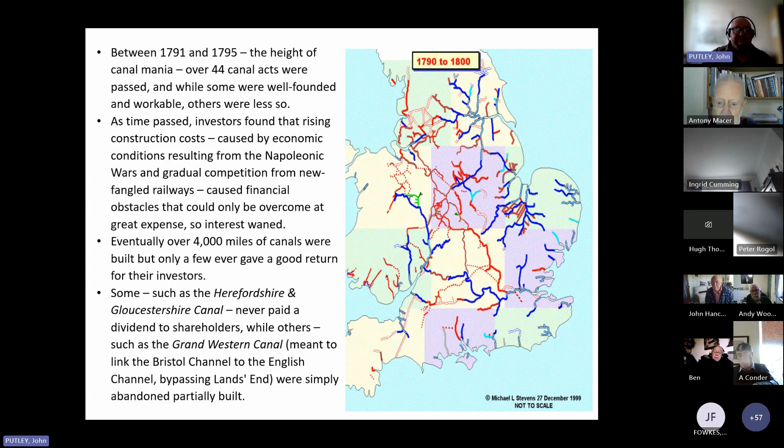So let's look at how canals were built. Before any work commenced, potential routes would be surveyed. The ideal was to create a route that required as little engineering infrastructure, so few locks, viaducts, tunnels, etc. as possible. This made it a lot cheaper and much more profitable in the end. So the early canals especially would often meander through the countryside as they followed land contours. However, later canals often took more direct routes, using the classic cut and fill technique, so you use material from cuttings to build embankments.

Therefore, you can make your canal go a lot more in a straight line, making it easier and faster. So after a survey had been done, normally an Act of Parliament would be obtained, after which authorised funds could be raised, usually via shareholders.

The canal company would then appoint a chief engineer. He would also have an engineering plan drawn up. This always had to be deposited with the local quarter sessions. So here in Gloucestershire Archives, we have quite a few canal plans, many of which never came off, but some of which did.

Then after this, necessary land would be purchased. Often you might have to have minor deviations if landowners refuse to sell. Not always, but some. In terms of actual construction, the first stage was pegging out, so basically marking where the canal's going to go, starting at one end or the middle and working either way, after which topsoil would be removed and then the cutting, hence the cuts of the canals, or digging, would commence.

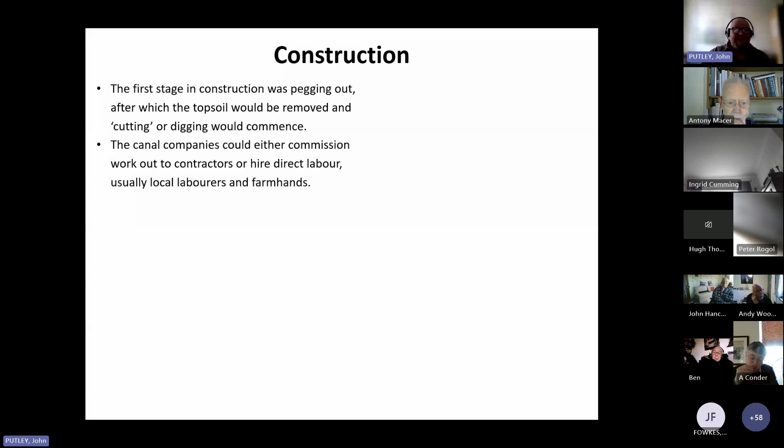The canal companies could either commission work out to contractors, or they often hired direct labour, usually local labourers and farmhands. The contractors usually employed migratory gangs of workers who became known as navigators, or the navvies, because they dug the navigations as the canals were known. Contrary to popular belief, most navvies were English.

They did frequently take their families with them, and they often lived in crowded tented camps or temporary huts near to the canal, sometimes in one place, sometimes they would move along. The early navvies, it has to be said, were not as feared by local communities as the later railway workers were, primarily because there were fewer of them and fewer places they were working.

Today, interestingly, there's only one set of surviving navvy housing known, and these are wooden huts at Edmondthorpe and Wymondham Railway Station in Leicester. And these wooden huts are now protected as Grade 2 listed buildings.

However, we think the tiny hamlet of Newtown near Stonehouse may also be navvy housing. Here, the buildings all face the canal and not the road, which you'd think they would do if they were sort of normal houses. They all have similar features and similar construction materials, suggesting they're all built at the same time.

And it seems possible that the site was built by the Stroudwater Canal Company, and there are 3 larger houses there. They would have been built for the senior staff and craftsmen, while the smaller houses were probably built for senior navvies, the guys in charge of groups of the navvies. But these houses also have very long gardens, which would have been very suitable for crowding in temporary or tented hutting. So we think this could possibly be a remnant of a navvy settlement.

So canals were usually built to a shallow U or V shape with gently sloping sides, and this is a typical cross-section of one. The canal bed and sides were made watertight by a process either of lining or by puddling. Now, puddling involved making a thick clay mix of loam, clay and coarse sand, which was then physically worked in and trodden into the canal bed and sides.

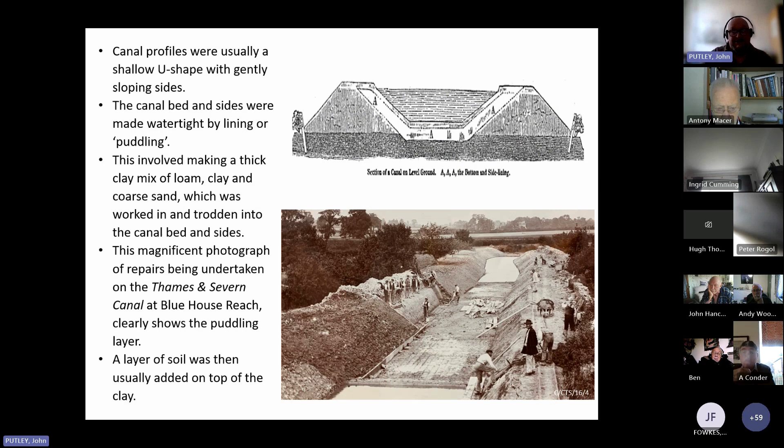So some of the features of canals, the most obvious one are locks. Locks are used for basically raising and lowering boats between stretches of water of different levels. Obviously, a canal can't have an incline; it's got to be relatively flat. So this is what enabled canals to climb and descend hills, basically.

There are several types of lock, but in Gloucestershire, most of ours are pound locks, so called because they have a pound of water at each end, a pound pond, basically, and an internal lock chamber that can be filled or emptied with water.

Lock gates are made of timber, oak or elm, mostly oak today, and their ends are mitred so that when they close you get a good watertight seal. The gates are opened by the arms there, which are also called balance beams, and when the water level is on the correct level for the gate, they open actually very, very easily, despite the fact they can weigh quite

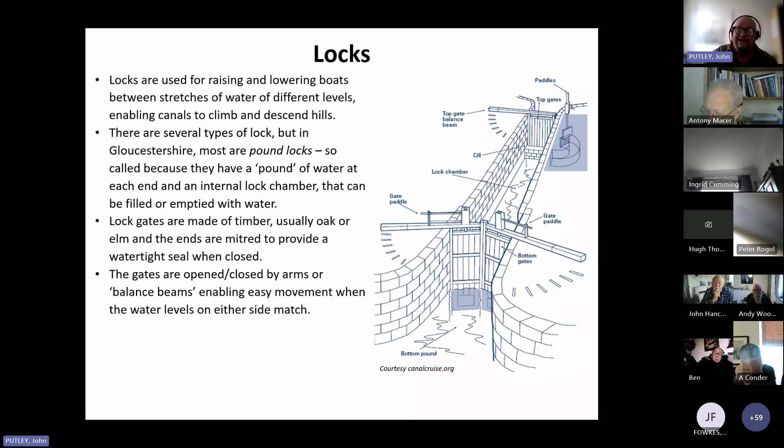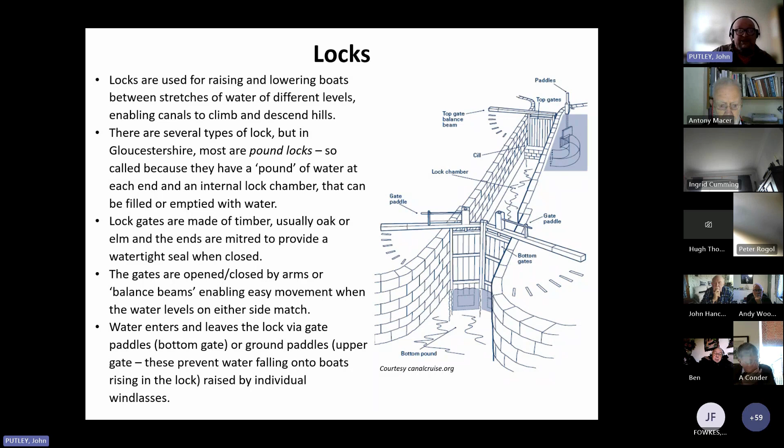a few tons. So water enters or leaves the lock via gate paddles, usually on the bottom gate here, or ground paddles on the top gate. The ground paddles let water in underneath the gates, basically, on the side of the gates, and this stops boats being flooded with lots of water pouring in. And if you haven't seen a lock operate, it's well worth trying to find one that is. On some of the Birmingham navigations, the locks are in use quite a lot, and it's quite fun to watch it work.

This is a lovely little lock, Blunder Lock. It was built in 1778, and it's one of these things that shows you locks didn't always go according to plan. Blunder Lock is actually the fourth in a flight of 5 locks that carries the Stroudwater Canal up past the village of Eastington. You hardly notice it's a climb, but it is. So they had to build 5 locks to get the canal through there. And on this flight, the positioning of the locks and the choice of levels had to take account not only of the natural topography of the land, but also crossing a farm track, a stream, and an important road.

So Blunder Lock was so called because the engineer, Thomas Frewin, who was in charge of building the canal, made an error when setting out its level. So he got the level wrong, basically. And the result was that the second and third locks in the flight, Dock Lock and Pike Lock, had to be deeper than planned, while the fourth and fifth locks, Blunder Lock and Newtown Lock above it, were much shallower. So hence, when people realised this, they started calling it the Blunder Lock because he'd made a blunder in his calculations.

The mistake wasn't just embarrassing to the canal company, but it did actually cause subsequent water management problems. All these things had to be gauged. How much water did the lock use? And don't forget, every time a lock was filled and emptied, that's a lot of water going down the lock. So it had to be replaced from above the lock. So these water management things were quite important.

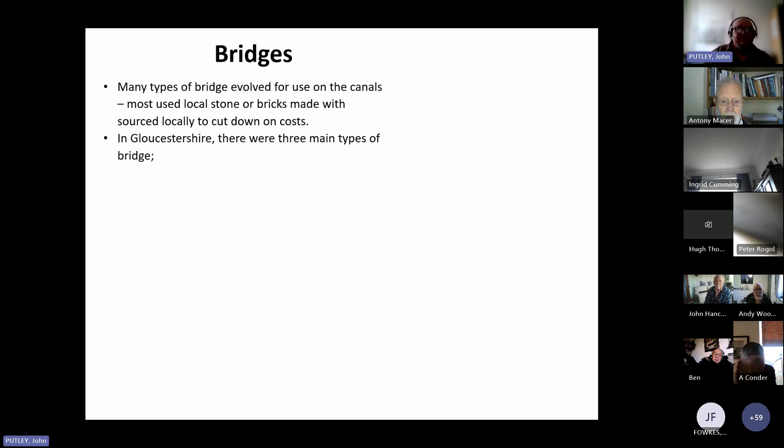Looking at bridges, many types of bridge evolved for use on the canals. Most used local stone or bricks made with locally sourced material to cut down on costs. And in Gloucestershire, we've got 3 main types of bridge. So we've got the road bridge. This is an example. This is Pike Bridge at Eastington. Sadly, this has now been rebuilt as a much less attractive concrete bridge. But you basically see what it does. It's a good, robust bridge that carries a road of some sort across it.

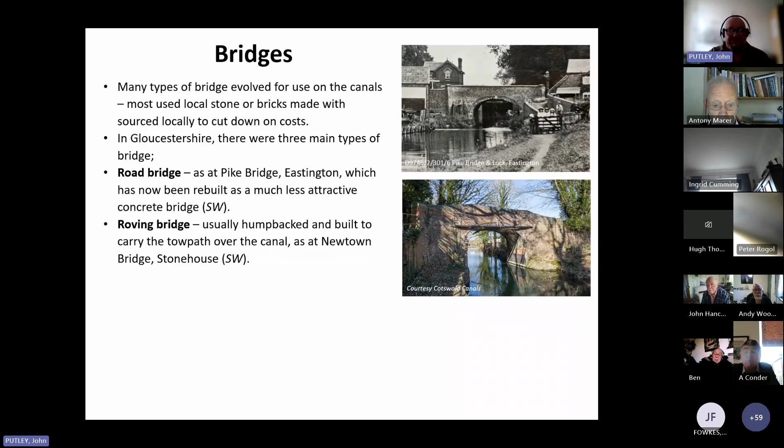Then you get the roving bridges, and these are lovely little things. They're usually humpback, and they were built primarily to carry the towpath over the canal. This is Newtown Bridge at Stonehouse, which is a lovely little bridge. There is actually a little road that goes over it, but mostly it was built just to carry the towpath, and they're quite steep and definitely humpbacked.

You then also get swing bridges, and this is a swing bridge here on the Gloucester and Sharpness. Elsewhere in the county, they tend to be on the Thames and Severn. Siddington is an example. And the ones on the Thames and Severn were quite small, single-span types, usually carrying a farm track over the canal, and they can be easily opened and closed.

The ones on the Gloucester and Sharpness, which is technically a ship canal rather than a normal canal, so it's much wider, were usually comprised of 2 half wooden spans, which could be swung to let vessels pass. However, as time passed, they've now been replaced by single-span steel bridges. And again, if you go down to the Gloucester and Sharpness Canal at one of the bridges, you'll often see them swinging open. And again, it's quite nice to watch.

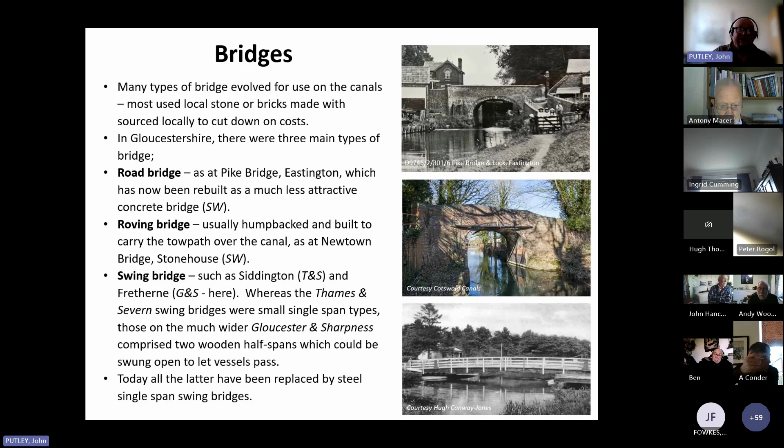Look at aqueducts. These were carrying the canal over things. A few small ones existed in the county, mostly on the Herefordshire and Gloucestershire Canal, and also on the Thames and Severn. This is the Smerril Aqueduct on the Thames and Severn. It comprised a single stone-built arch, carried the canal over the Kemble to Cirencester Road. This is the only known photograph that survives, and today very little remains there. You wouldn't know there was ever a canal aqueduct bridge there at all.

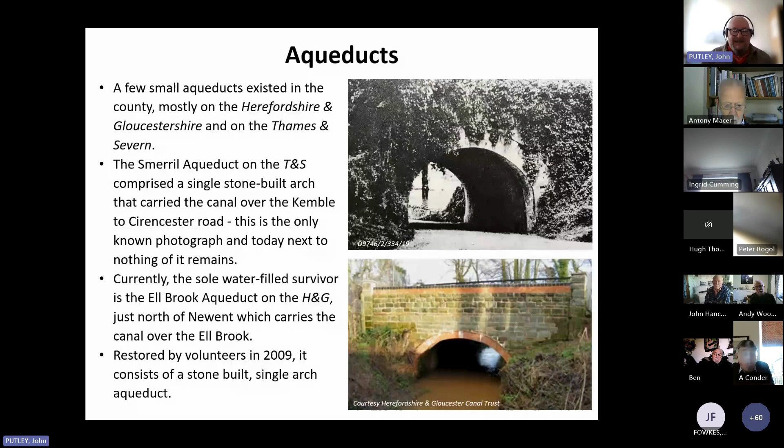We do have a nice one though. The sole water-filled survivor aqueduct is the Ell Brook Aqueduct on the Herefordshire and Gloucestershire Canal. It's just north of Newent, and it carries the canal over the Ell Brook. It was restored by volunteers in 2009 and consists of a stone-built single-arch aqueduct, so very similar to the Smerril one. We don't have any of the massive aqueducts that you find in the rest of the country, I should say. But we have other features as well.

So the lengthsmen were canal employees responsible for set lengths of the canal, and their duties included management of the towpath, the locks, lock keeping, bridge and bridge keeping, management and monitoring of water levels, plus repair and maintenance of banks on their length. And this included cutting reeds and vegetation. If you remember, there's the 1980s BBC programme The River. The main character there was a lengthsman, basically.

So the Thames and Severn's lengthsmen's cottages were unusual. Instead of being rectangular houses, they were circular stone roundhouses. They usually had a basement stable and a store, living accommodation on the next two floors, and then a roof cistern for collecting rainwater. And they were ingenious little things. Five were built, but sadly they proved quite cramped and impracticable for day-to-day living. And we know two of them, at Cerney Wick and Marston Meysey, were superseded by more standard rectangular cottages. But there are a couple of the circular ones still surviving to this day.

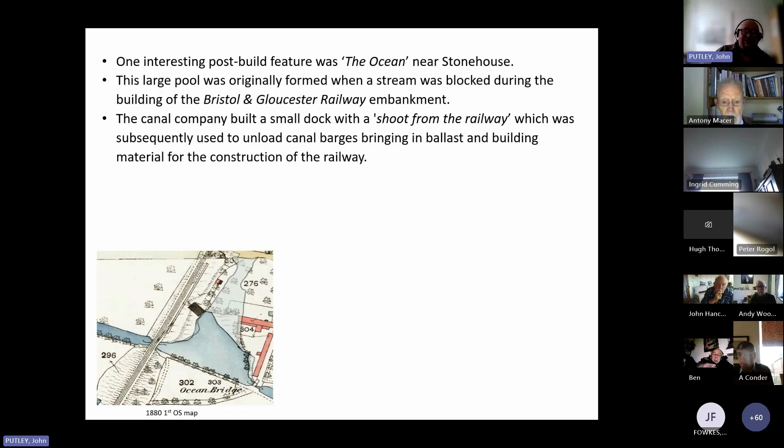One interesting post-build feature was the Ocean near Stonehouse, a large pool that was originally formed when a stream was blocked during the building of the Bristol and Gloucester Railway embankment, and the canal company subsequently built a small dock with a shoot from the railway, which was used to unload canal barges bringing in ballast and building material for the construction of the railway. So it's very ironic that the railways, which would later take all the canal trade, relied on the canals very often to build them initially.

What's interesting is she had no sails or engine, so she was basically locked out into the Severn on the ebb tide and returned on the flood tide. And she was steered by essentially lowering a lump of pig iron on a chain that dragged along the riverbed to retard her progress, so she was able to be steered that way. And of course, on the flood tide, the reverse would happen. So a fascinating way of working a boat with no engine and no sails, and a crew of 2 or 3 basically.

So the Stroudwater Navigation Company left behind a massive archive, which includes letters, minute books, tonnage books, and much more.

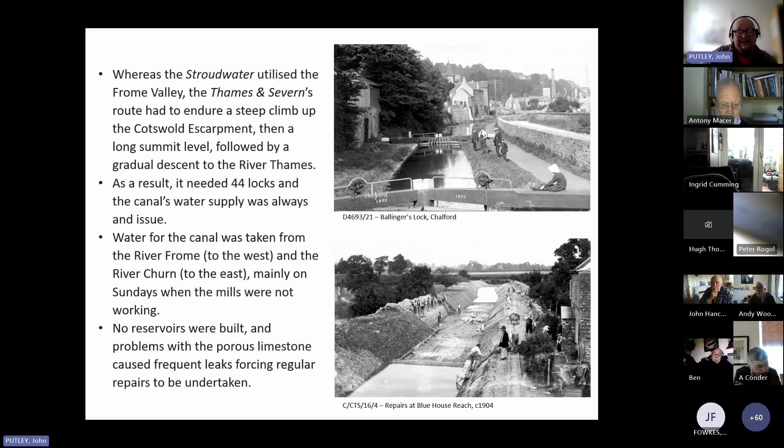No reservoirs were built, and there were problems with porous limestone, which caused frequent leaks as springs would often burst through the limestone and the puddle in there. And I make no apologies for showing this picture of Blue House Reach again, because I just like it so much. But one of the troubles was, because of this porous limestone, lots of repairs had to be undertaken, and water supply was always an issue.

The Thames and Severn featured some quite major engineering works along its length, including the Sapperton Tunnel, Brimscombe Port and Basin, the Daneway Basin and the Thames Head Pumping Station.

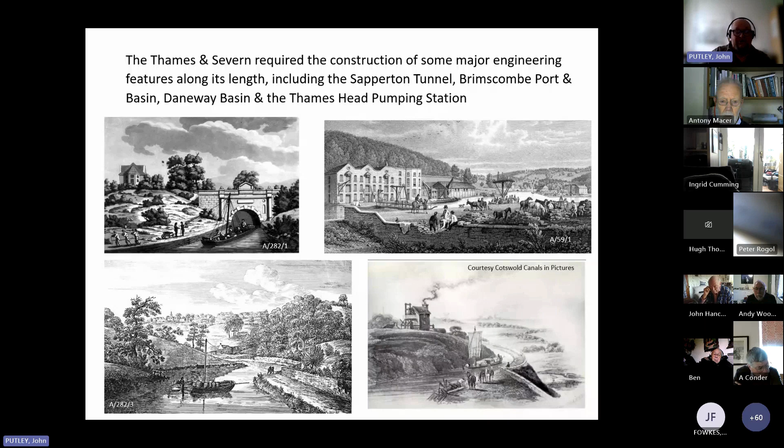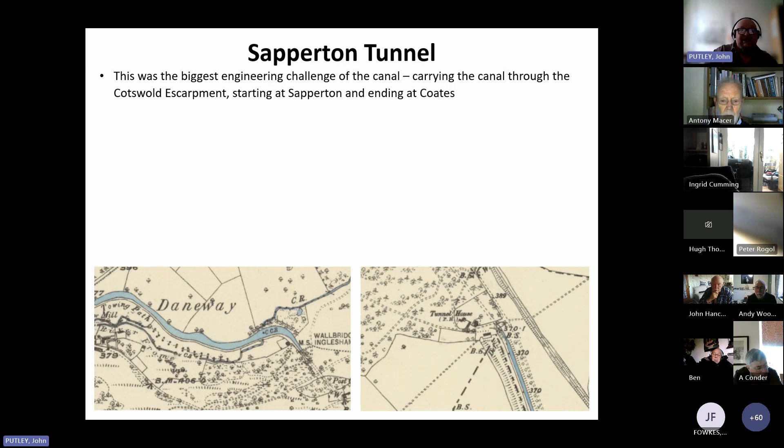Construction began in 1784. Charles Jones was the initial contractor, although he was later replaced for many reasons, including his love of the bottle, has to be said. It was 15 feet high and wide, 213 feet below ground at its deepest point, and literally 3,817 yards long. It was the longest tunnel of any kind in England for 22 years, until it was surpassed in 1811 by the Huddersfield Narrow Canal's Standedge Tunnel.

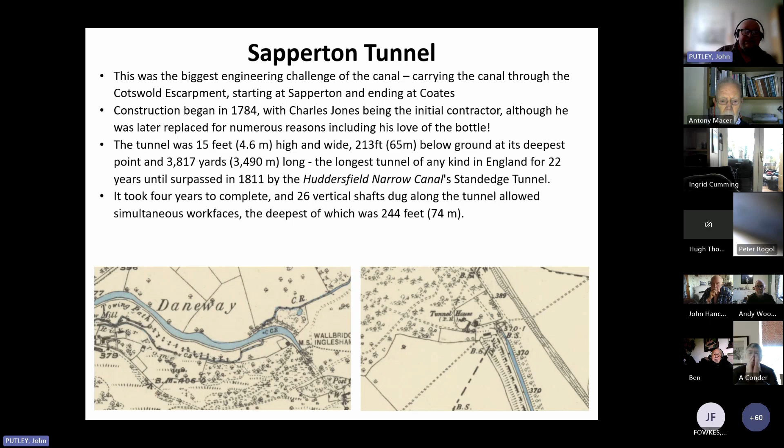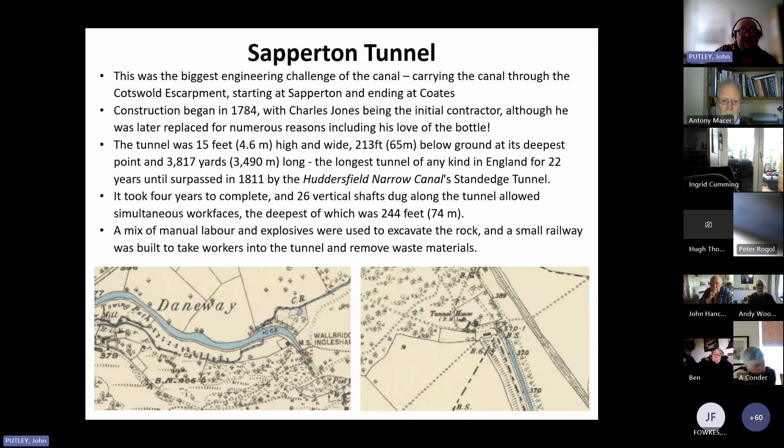The actual Sapperton Tunnel took 4 years to complete. There were 26 vertical shafts dug along the tunnel that allowed simultaneous working, and the deepest of these was 244 feet down. So again, quite deep working going on here. A mix of manual labour and explosives were used to excavate the rock, and a small railway was actually built to take workers into the tunnel and remove waste materials before it was put into water.

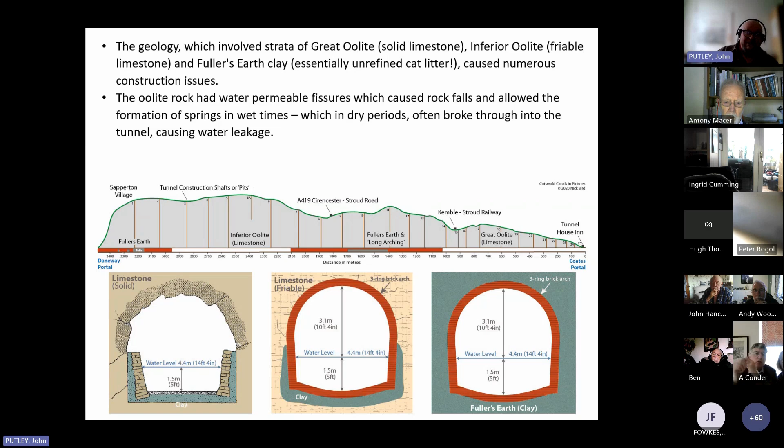So the geology of the tunnel involved passing through the Great Oolite, which is solid limestone, the Inferior Oolite, which is friable porous limestone, and also Fuller's Earth clay, which is essentially unrefined cat litter. And the combination of these three types of geology caused many construction issues. The Oolite rock especially had water permeable fissures, which caused rock falls and allowed the formation of springs in wet times, and in dry periods, the deeper ones often broke through the tunnel, causing water leakage.

In areas where the tunnel went through Fuller's Earth clay, it had to be lined with expensive brick, and after the tunnel opened in 1789, it did require quite frequent maintenance. And these are great pictures here from the Cotswold Canals in Pictures website, well worth looking at, which give you an idea of what the conditions were like there.

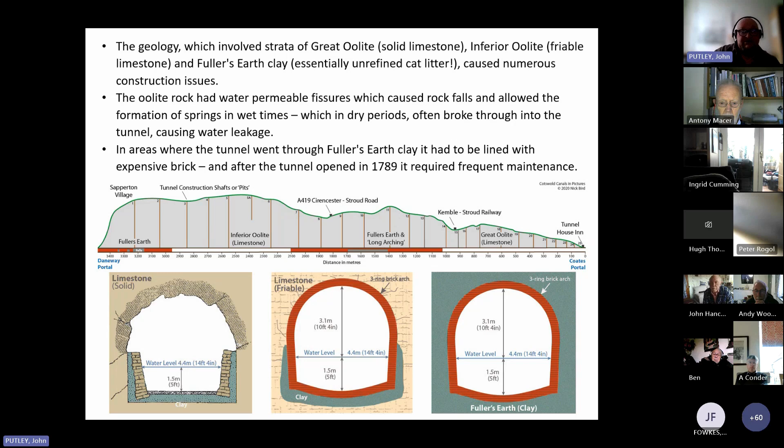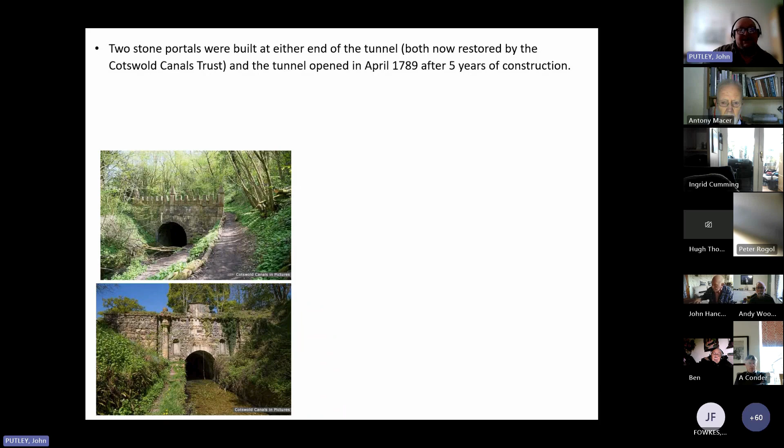So 2 stone portals were built at either end of the tunnel. They've both now been restored by the Cotswold Canals Trust, magnificent organisation. And the tunnel opened in April 1789, so 5 years of construction. Too narrow for any kind of towpath, so boats passed through either using poles or by legging. And a typical transit took about 3.5 hours.

So Brimscombe Port, this was the headquarters of the Thames and Severn. It consisted of a large basin with wharfage, a barge weighbridge, warehousing and a shipyard. It permitted the easy transshipment of goods from Trows coming up from Stroud into Thames barges, which carried the goods eastwards towards London.

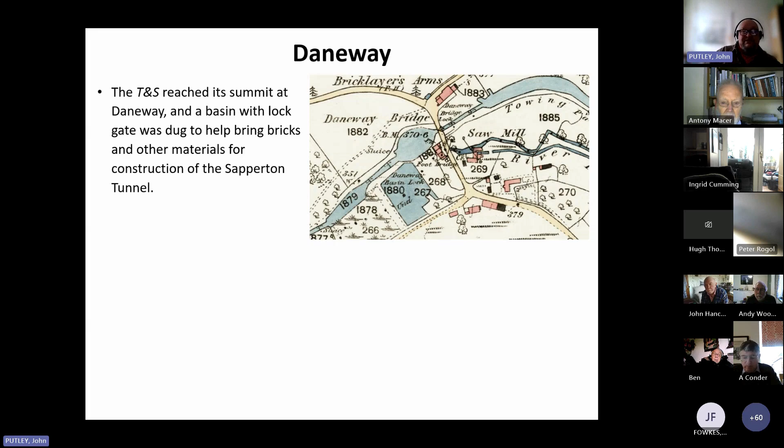So the Daneway, this is where the Thames and Severn Canal reached its summit really, and a basin with lock gate was dug to help bring bricks and other construction materials for the construction of the Sapperton Tunnel. Once the tunnel was finished and opened, a sawmill and timber yard was created there for the nearby Bathurst estate, and also workers' cottages there were built.

The Bricklayers Arms, which is now the Daneway pub, was originally built to house the managers and overseers of the navvies building the canal, and was named to celebrate the workers who were busy lining the canal with the bricks. So again, a nice little bit of history there.

Moving on to the Thames Head. Because the Thames and Severn didn't have any reservoirs, it had to install pumps. So the first one was a wind pump near Kemble, which raised water from a well and dumped it into the summit level. And the idea being that it's just going to start then flowing down both ends of the canal as the locks were opened. This proved very inadequate, however.

So in 1794, a Boulton and Watt Cornish beam steam engine was installed. This ran from June to October, which is the dry season, and it could pump 3 million gallons of water a day, but a lot of this was lost through leakage. In 1854, it was replaced by a newer engine, which ran nicely until 1912. It was then stopped, and the whole thing was removed in World War II for scrap metal. Today, nothing remains at the site, which is a shame, because it'd be lovely to have it there.

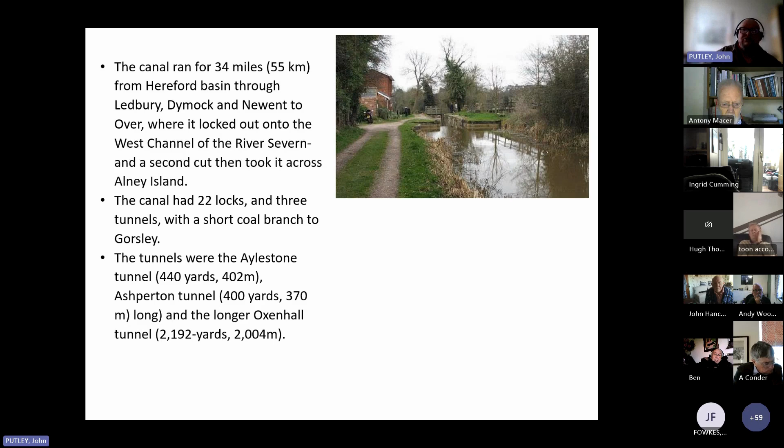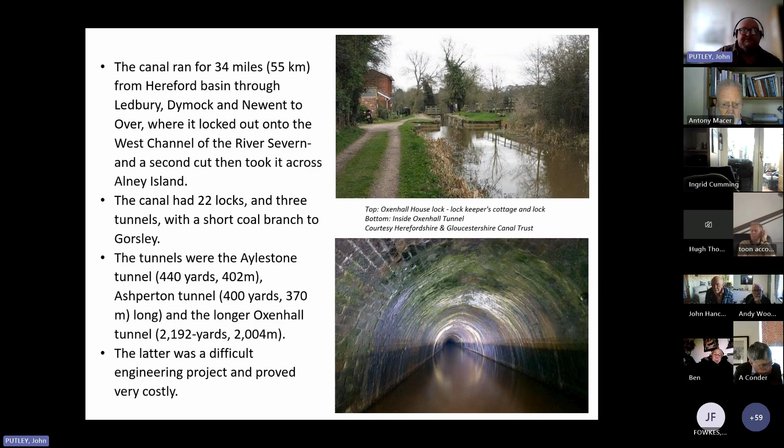The latter especially was a difficult engineering project and proved very costly, and was responsible for the canal eventually not making any money at all, or very little, because it was just so expensive. However, one very notable bridge on the Herefordshire and Gloucestershire Canal is the Monkhide Skew Bridge. This is really odd because it was built to allow a minor no-through road to cross the canal.

It's constructed of red brick with stone dressing. The parapets are capped with large engineering bricks made by B.W. Blades of West Bromwich, and it is a Grade 2 listed structure right in the middle of the countryside, miles from anywhere, basically. It's a wonderful bridge, it really is.

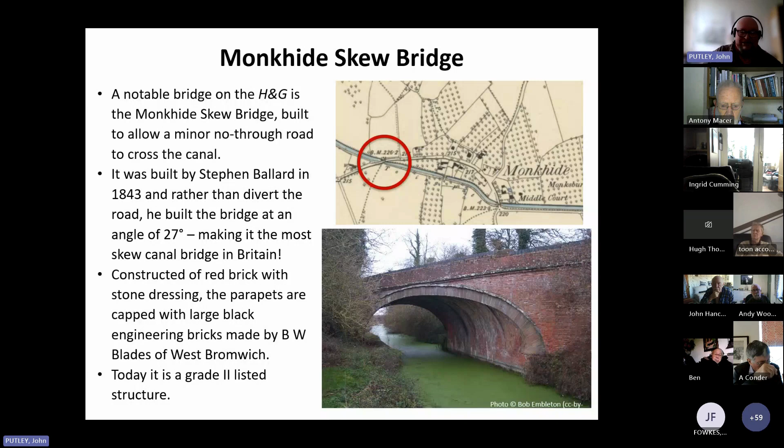So by 1795, the H&G Canal was open between Gloucester and Newent, but it wasn't until 1845 that it reached Hereford. Its cost had far exceeded estimates, so that almost immediately the canal company proposed to sell the canal and convert it to a railway, as by this time railway mania had overtaken canal mania. Initially, this came to nothing, but in 1862, less than 17 years after its full opening, the canal was leased to the Great Western and West Midland Railway.

Conversion didn't take place immediately, but in 1881, half the canal was closed. It was filled in, and large sections of it were used for the course of the Ledbury and Gloucester Railway. The canal company continued to receive rent from the Great Western Railway, which it distributed to its shareholders as dividends, very poor ones. And the company was not formally wound up until the railways were nationalised in 1948. So an amazing lateness there.

Moving on to the Coombe Hill Canal near Cheltenham. This opened in 1796, primarily to allow Staffordshire and Forest coal to be moved as close as possible to the then rapidly expanding town of Cheltenham. It cost about £5,000 and ran for just 2 3/4 miles from a lock on the Severn, which could accommodate quite large barges of 60-70 tons, from just above Wainlode Hill to Coombe Hill.

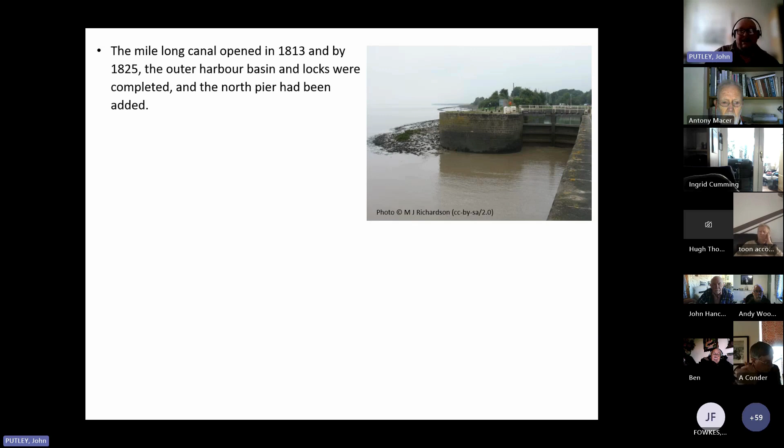We next come to the Lydney Canal. In 1810, the Severn and Wye Canal Company obtained an act authorising the building of a canal to the Severn at Nass Point, linking to a tramway that ran from the forest's interior. The mile-long canal opened in 1813. By 1825, the outer harbour seen here and the locks were added, and a north pier had been added as well. Coal loading staithes were built at the northern end of the canal, allowing Lydney to become a thriving coal port for Forest of Dean coal.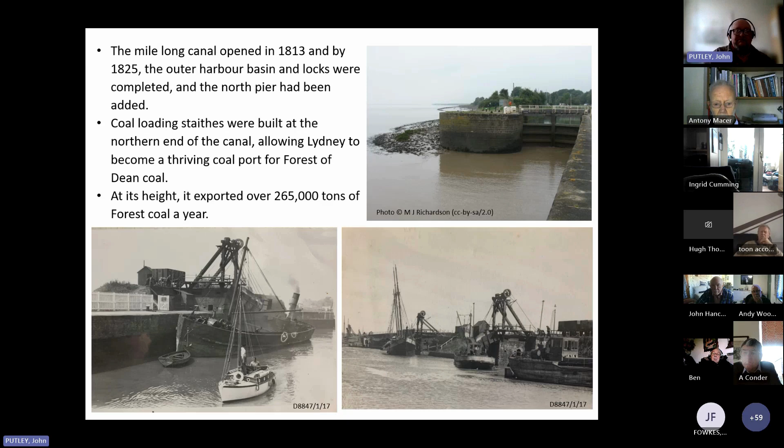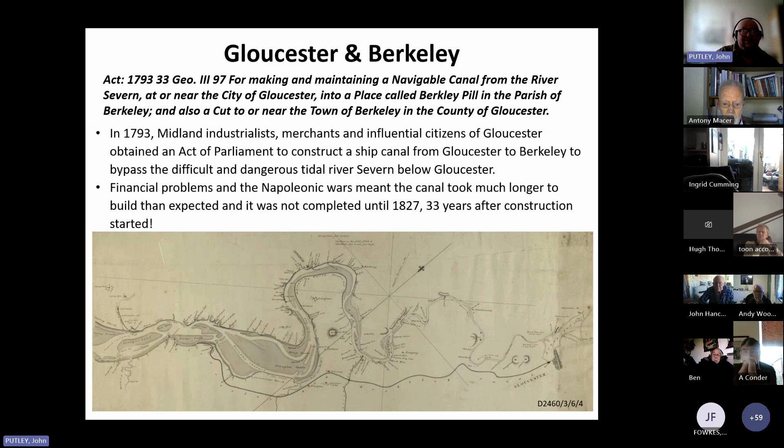86 feet 6 inches wide, 18 feet deep. The canal could handle a craft of 600 tons, so they could be over 190 feet long. And for a time, it was the biggest canal in England. During the hiatus in construction, caused because the company ran out of money, basically, it was decided to take the canal not to Berkeley, but to Sharpness, as it was judged that the latter was a better place for an entrance from the River Severn.

So the canal had a sea lock and small basin at Sharpness, which is still there today, but there were no cargo handling facilities here, so basically ships went on to Gloucester, where a second basin with warehouses and cranes was built to discharge cargo. And of course, this is what later became the famous Gloucester docks. Despite the change of destination, the company was also officially known as the Gloucester and Berkeley Canal Company until 1935, when it was finally renamed the Gloucester and Sharpness Canal Company.

So by the late 1860s, the increasing size of ships made the original entrance at Sharpness too small. So a new floating harbour was built at a cost of £400,000. This opened in 1874. And again, a marvellous feat of engineering. You can't help but imagine how expensive this would be to make today. It'd be prohibitive. It'd be HS2 style costs.

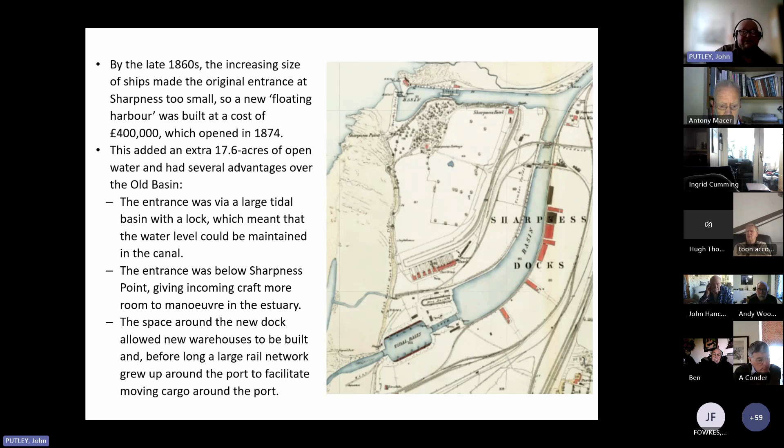So it added an extra 17.6 acres of open water and had lots of advantages over the old basin. The entrance was a large tidal basin with a lock, which means the water level in the canal could be maintained quite happily. The entrance was below Sharpness Point, giving more craft room to manoeuvre as they entered the dock, and also the space around allowed new warehouses, and before long a large rail network grew up around the port to facilitate cargo handling around it.

And this is a wonderful photograph of the port of Sharpness from the Coaley.net website. This was taken by Fred Rowbotham. It's from his collection, and it just gives you an idea of the sheer size of the new basin and the old basin. On the left-hand side there, you can see the old basin. You can see the lock and the harbour master's cottage. But look in the middle, that sweep of the new basin, absolutely huge.

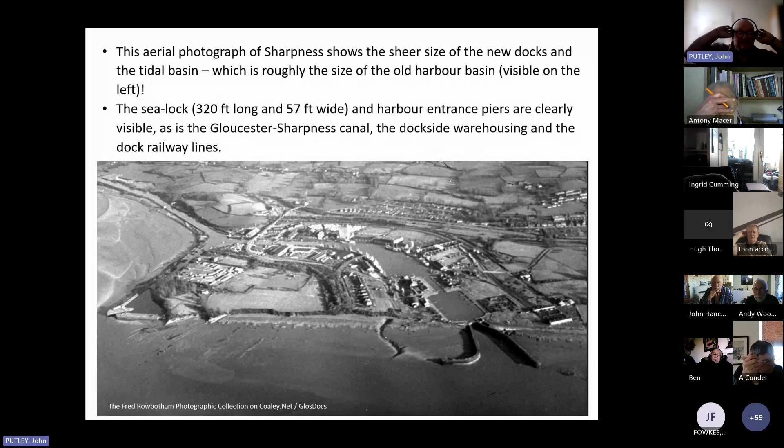The sea lock itself, 320 foot long, 57 foot wide, and you can basically see some of the lines around there. Sharpness is still a working port today, although hopefully it will survive. It's not as busy as it once was, but fingers crossed it will.

So looking at other sites on the Gloucester Sharpness Canal, one of the most important was the Slimbridge Wharf. So in World War I, storage of explosives and propellants for munitions was nationally important. Two new national storage sites were built, one at Skipton in Yorkshire, and the other was at Slimbridge on the estate of the Berkeleys. It was known as His Majesty's Magazine number 23, had 17 munition stores; 16 held 200 tons of cordite, 1 held 2,000 tons, and they were all served by a wharf on the Gloucester Sharpness Canal

at Shepherd's Patch, seen here. It also boasted an internal rail network, an engine shed, guard barracks, and a rail link to the Bristol-Birmingham mainline railway. And that's a little plan of it, with the canal there in the top left, as you can see.

Post-war, the site was used to dispose of cordite by burning. You can burn cordite quite happily; it doesn't go bang. And interestingly, when it was handed back to the Berkeleys in 1924, they stipulated that every structure where a fox could hide was to be removed, so the animals were less able to avoid the hunt. Isn't that nice?

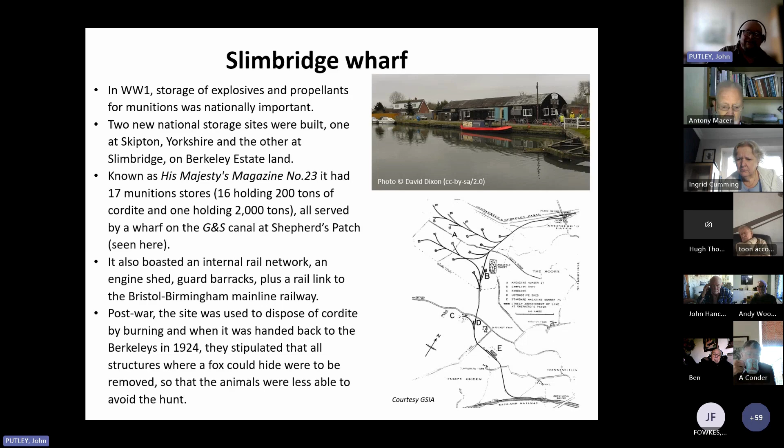Frampton-on-Severn, Cadbury's Wharf, 1915. The Cadbury brothers loved using canals; they loved the canal network. They acquired land under DORA, the Defence of the Realm Act, to build a milk processing factory and a wharf at Frampton. Opened in April 1916, milk from the Vale of Gloucester was brought into the factory, where it's pasteurised, then mixed with cocoa beans and sugar, brought up in barges from Bristol, to make the famous chocolate crumb. The crumb was then transported onwards to Gloucester, then via the River Severn and the Worcester and Birmingham Canal to Cadbury's Bournville in Birmingham.

By 1917, as well as chocolate, the site was making condensed milk and cheese. And by 1918, it was also supplying pasteurised milk to Birmingham as well. So it was quite an important site. And it remained open until 1982, when it closed.

Moving on, as you get nearer Gloucester, we get to Monk Meadow Dock, and this was home to the Shell-Mex BP Quedgeley Tank Farm. Built in 1941-42 as a part of the GPSS, the Government Pipelines and Storage System, it was known as the Gloucester AFD, Aviation Fuel Depot. It received fuel by road, rail, but mostly by tanker barge, and there's a lot of history of this in Gloucester. By 1959, it's transferred from the Air Ministry to the Ministry of Power, and then to Texaco in 1971, but it was still owned by the government.

However, it closed in the early 1990s after the end of the Cold War. It was disconnected from the still strategically important GPSS, which interestingly was sold off to Spain in 2012 by the Conservative government. So again, a national asset being sold off to somebody else.